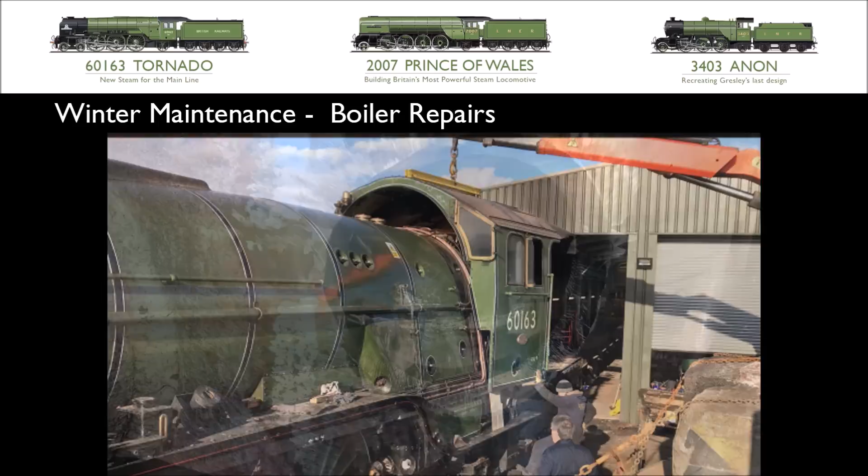A previous A exam had identified that we would need to repair some cracks beginning to form in the firebox corners. So these were ground out and welded up under the supervision of our boiler inspector, and prior to the steam test, these were subjected to non-destructive magnetic particle testing.

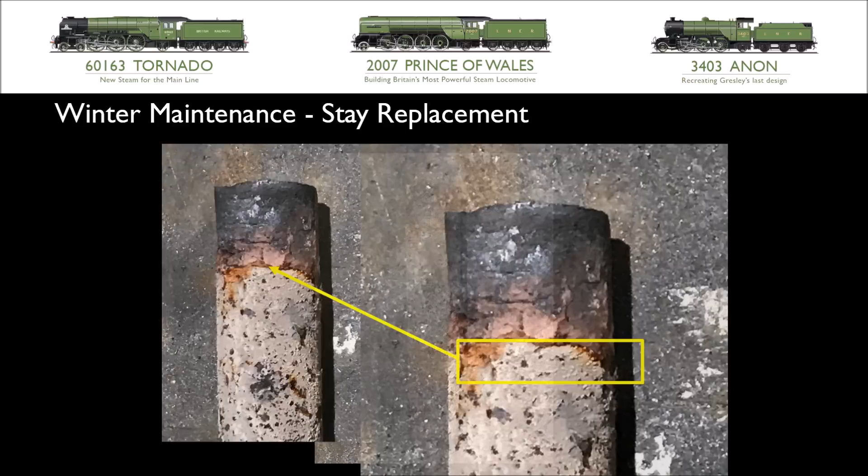The removal of 137 stays took longer than planned, as these were somewhat more stubborn to remove than they should have been. Many seemed initially in good condition, but on closer inspection we realised that we had made a good call to replace them before more failures occurred when the loco was in traffic. And once removed, it's a fairly simple welding task, if you know what you're doing, to replace them - first welding up the outer end before welding inside the firebox.

As part of the maintenance, all the motion was taken down to inspect the bearing clearances, and the oilways and felt pads were cleaned and replaced before reassembly, and key components were also tested to detect any cracks or flaws developing in the rods or the motion.

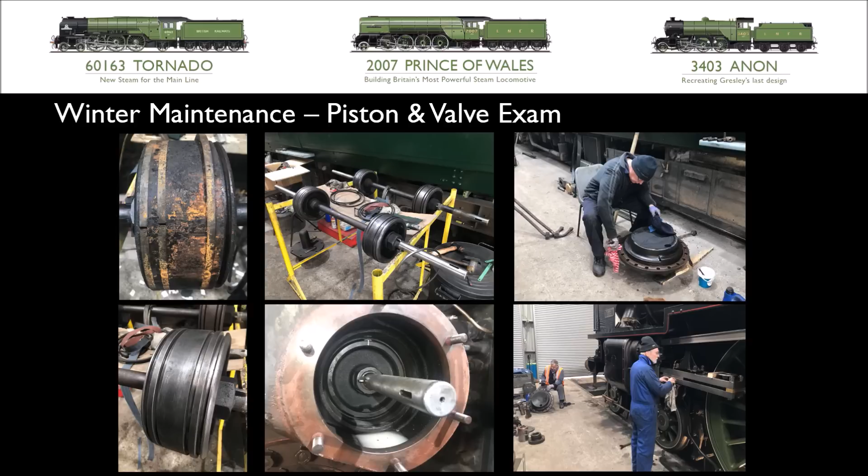At the front end, the valves and pistons were examined to ensure no broken rings or other issues were present, and that there was no excessive wear in cylinders or valve bores. Once cleaned and inspected, these were all oiled, replaced, covers replaced and flogged up tight.

Attention was not solely focused on Tornado, and our support coach received a great deal of attention inside and out. The kitchen and compartments were thoroughly cleaned by our volunteers, and a local car valeting company left the seats in each compartment looking like new.

On the underframe, brake components were removed, sent for overhaul and refitted prior to completing a full annual exam in accordance with our vehicle maintenance instructions.

Finally, there was time for a steam test and a couple of days running in before running service trains for the Wensleydale Railway, and the full effects of COVID-19 began to take hold.

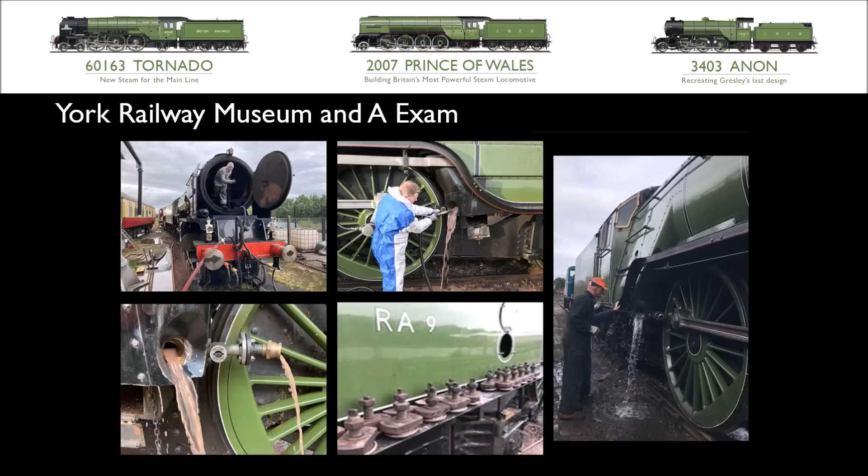With our first trains cancelled, we moved the loco and coach to stable at the Railway Museum in York, suitably protected from the elements and the pigeons. As other operating companies began to make plans to restart trains, we completed a full A exam and boiler washout, even though the locomotive had not been long in traffic before lockdown.

Following a successful steam test and an FTR exam, we moved across to Carnforth to undertake some work on the locomotive and coach. After arriving, we began a makeover to assume the identity of lost classmate 60145 St Mungo, using water-based poster paints and weathering techniques with advice from a colleague who has weathered complete locomotives in preservation.

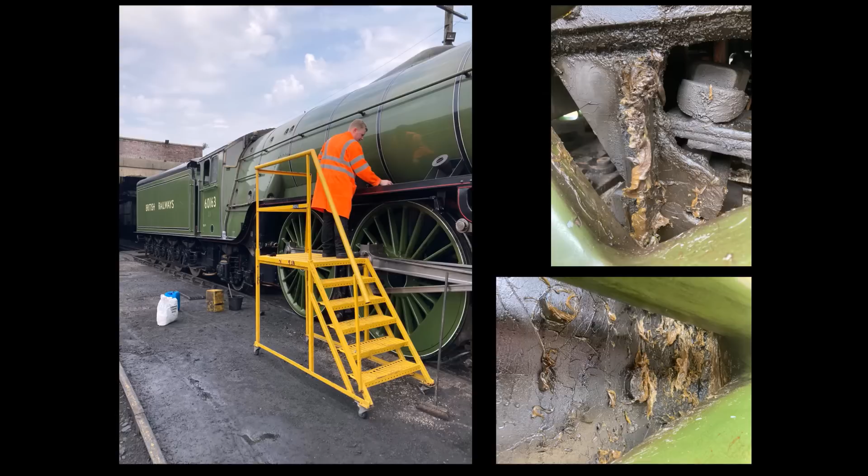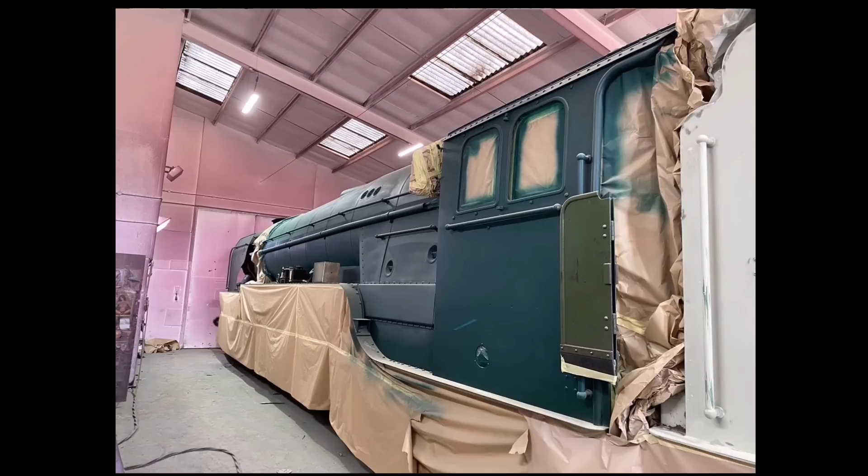Not just on the tender, but the locomotive as well, from rubbing down to the first coats of undercoat, several coats of gloss, and then the final lining out. I hope you will agree with us that the finished article is a credit to the West Coast Paint Shop team, to our own staff and volunteers, and all that have worked to deliver the locomotive into its new BR green livery.

Finally, many of you will know that DB Cargo's Senior Steam Traction Inspector, Jim Smith, sadly passed away earlier this year after a short battle against lung cancer. Jim was a really great supporter of the Trust, a real character and a friend to many of us. We were very fortunate that he was able to visit the maintenance at Leeming Bar and see so many of his friends there. We were not to know that this would be his last visit to see Tornado, but it was a pleasure to see him as always.

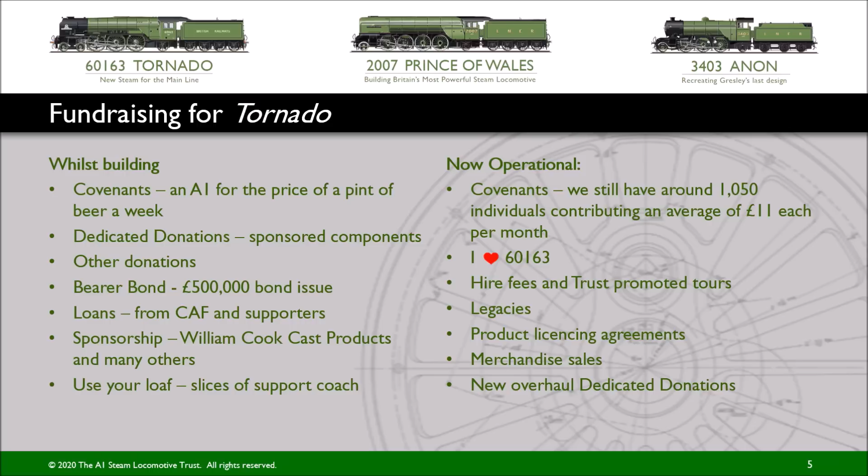I'm now going to take a look at the different fundraising methods that we use for Tornado. Clearly the most important of these remains the Covenant, an A1 for the price of a pint of beer a week. We did obviously use a variety of other fundraising methods during our time in which we were building Tornado, and some of those carried over into the operational life of Tornado, and others we introduced as well. I'm going to go through each of those one by one.

Our A1 for the price of a pint of beer a week Covenant is still the most important tool that we have to raise funds on an ongoing basis for Tornado and keep it operating on the main line. We still have over 1,000 Covenanters donating on average over £11 a month, which brings in around £170,000 a year to support the operations of Tornado. Even then, that isn't enough to actually keep the locomotive operating on the main line, which I'll touch on a little later on.

The Tornado Team is our club that we use to help to interest those youngsters aged between 5 and 15 in Tornado and everything that the Trust actually does. We've got over 100 members from as far away as Australia, Poland and throughout the United Kingdom. For parents and grandparents, it makes a fantastic Christmas or birthday present.

Legacies make up an increasingly important part of the funding to keep Tornado operating on the main line. We launched our legacy scheme in the summer of 2016, and since then we've received around 40 pledges to the office of people who have promised they're going to leave something in their will towards Tornado, and we've also received a number of significant legacies during the life of the project. Over the past year, the Trust received about £110,000 for Tornado, and that will be put towards Tornado's next overhaul, and of course the payment for its share of the spare boiler.

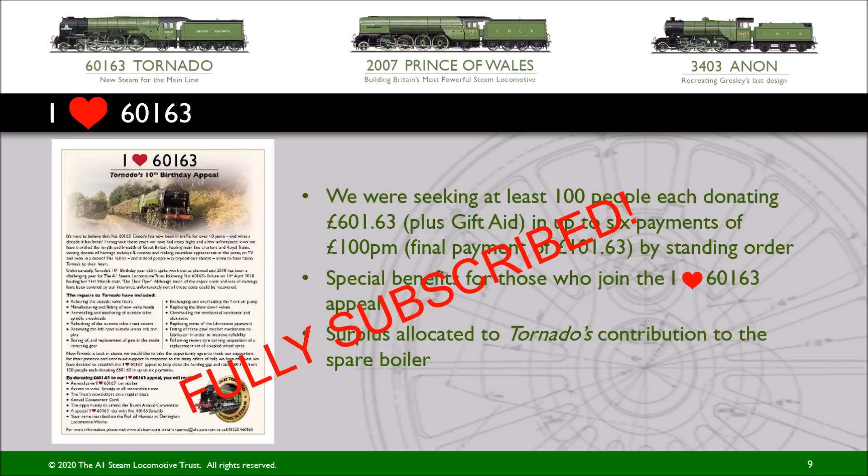The I Love 60163 fundraising scheme was launched to raise £60,163 for the unfunded part of Tornado's repairs. I'm pleased to report that over the course of the last year, that target was reached, and this fundraising scheme is now fully subscribed.

As we approach Tornado's next overhaul, there is a gap that we still need to fill in terms of funding of that overhaul due to the fact that Tornado hasn't been able to operate on the main line as much as we had hoped during this coronavirus impacted year. We've therefore decided to go back to our roots and to launch in the new year a new fundraising scheme based upon the dedicated donations scheme that was so successful during Tornado's building.

We'll go into that in much more detail around the time, but it'll involve being able to sponsor the overhaul or replacement of particular components that will be used during that overhaul. Please look out for the mailings that will be sent out during the early part of 2021.

So to summarise, Tornado still needs your help and support to keep her operating on the main line. What we'd hoped would be a spectacular year for our 30th anniversary as the Trust has turned out to be, unfortunately, a quieter one than we would have liked due to the impact of the coronavirus. We're therefore asking all of our supporters to see what they can do to support Tornado during these difficult times.

First of all, help us to reach out to recruit more new Covenantors by talking to friends, relations and other family members who may well be people who would be interested in supporting Tornado. When you're able to, please travel on one of Tornado's tours, and even better, bring some friends and family with you. You never know how they might enjoy the magic of steam.

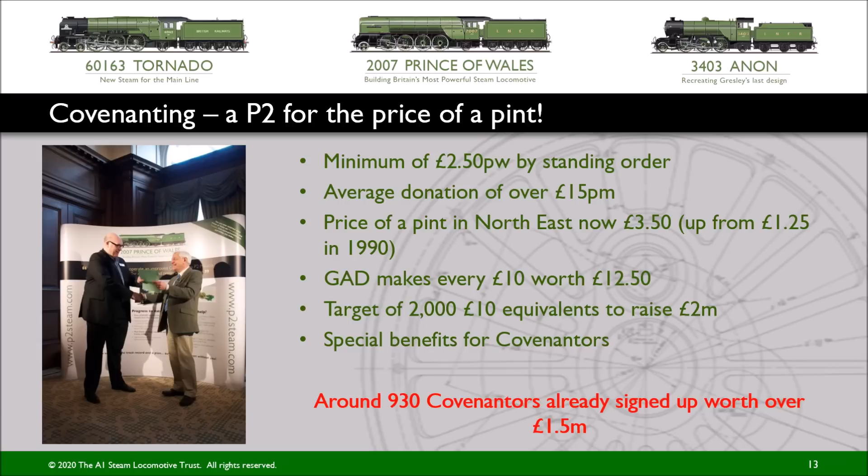One of the biggest challenges during 2020 has been not being able to conduct the outreach that we would normally do to try and bring on board new Covenantors. We had to suspend our programme of Works Open Days, and we had to do the same with our P2 road shows as well. So though we've managed to have a pretty successful year in terms of our other fundraising tools and techniques that we use, I'm afraid we haven't managed to recruit the number of new people to come on board as Covenantors that we would normally have been able to do.

Launched in July 2014, we've got a target of raising around £1.1 million from dedicated donations. There's still quite a long way to go, but there are an awful lot of dedicated donations that are available to sponsor. Should one not be there that catches your eye, please let me know, and we'll be able to find one that's suitable to any price and any pocket.

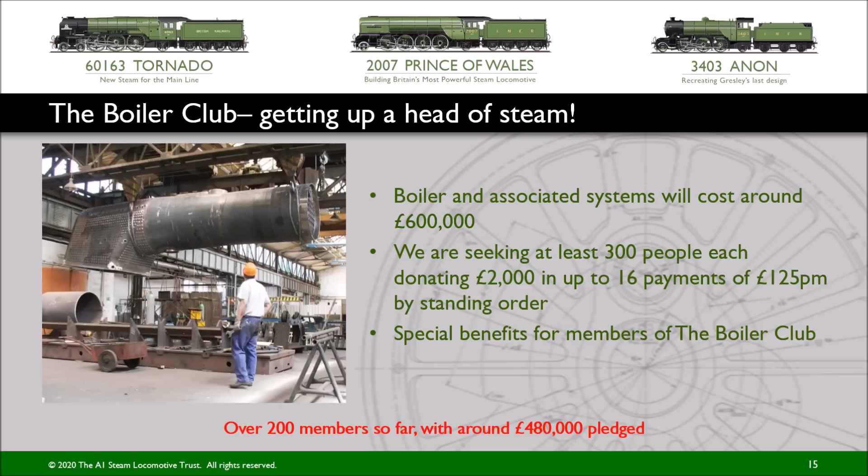The Boiler Club's one of the most important ongoing fundraising campaigns we have in support of building our new Gresley Class P2. As you can see, we've recruited over 200 members to this club so far, so that leaves us with 100 more to find by the end of 2021, when we expect our P2's boiler to arrive at DLW.

Sometimes things just don't work out as you'd hope they might do. When we launched the Motion Club, we were hoping that the club would progress at the same pace as the work on the Motion was progressing. Sadly, events conspired against us, and our fundraising campaign and the actual manufacture of the Motion got out of sync.

However, as you'll have read in Mikado Messenger and seen in TCC, we've made significant progress in recent weeks with the Motion for our Gresley Class P2, and the sight of all of that shiny metal enabled us to get the last few members over the line and hit our initial target of 175 members for the Motion Club, which means we've got that £210,000 pledged. Manufacture, as you know, is well underway, and I'm sure David Elliott will be covering that in a lot more detail later on.

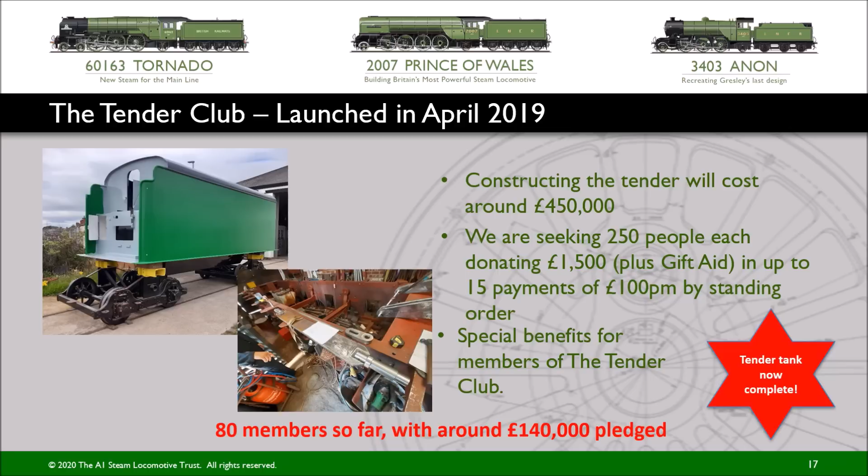We launched the Tender Club in April 2019 to raise £450,000 to fund the manufacture of the tender, and that club has made steady progress over that time. We've got 80 members out of the 250 that we require so far. In many ways, the tender construction progress has again moved ahead of that of the fundraising campaign that supports it. You can see from the slide here that the tender tank is now all but complete. Progress is very significant now on the tender frame, so it's vital that we encourage as many people as we can to join the Tender Club so that we can keep up with the pace at which tender construction is continuing.

In April of this year, we launched the first of our mini clubs. It was an idea to have something that sits between our dedicated donations and our larger clubs, such as the Boiler Club, to raise funds for a particular discrete part of the locomotive. We thought the pony truck would be a very good area to start, and we set ourselves the target of raising £20,000 for the manufacture of the pony truck. We hoped if any more funds came in over and above that, we'd put that towards the certification costs, which will be quite significant for this part of the locomotive where there have been design changes.

I'm delighted to say that we've received significant support in excess of the original 20 people we were looking for. In fact, we've had 30 people come on board so far, which means we'll be able to put those extra funds towards those certification costs, and we're expecting delivery of the pony truck to DLW in the not too distant future.

We launched the second of our mini clubs in June 2020, the Turbogen Club. This was created to fund the purchase and overhaul of our turbo generators, which will be two mounted on number 2007, and each will cost around £40,000. I'm delighted to say that so far 15 people have come on board, with around £18,000 pledged towards the first of those turbogens.

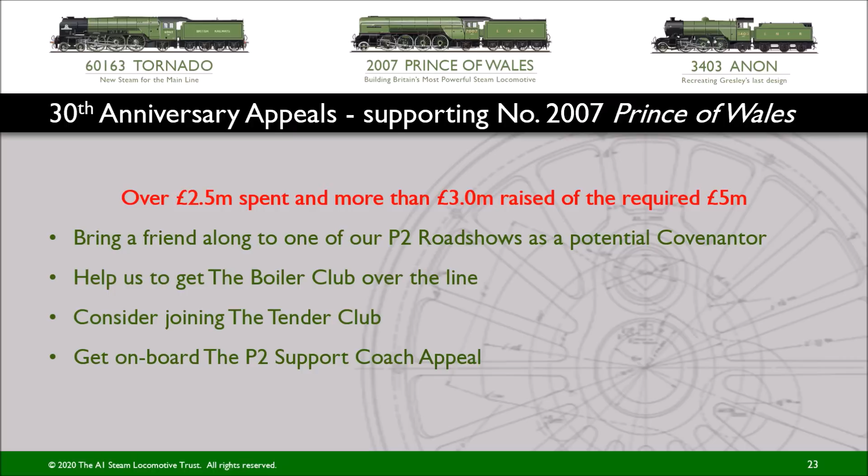Hello. The next few slides are probably the least interesting, but cover a very important aspect of the success of the Trust.

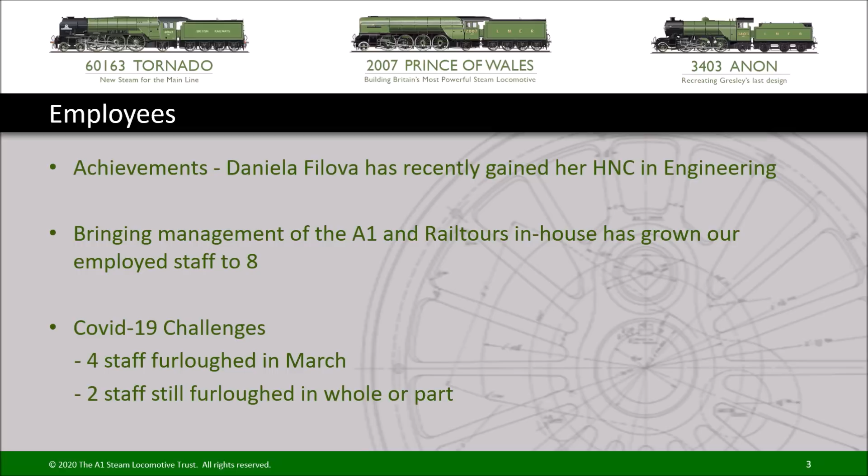Conversely, the pandemic has turned the world upside down, of course, and we've not been exempt from the effects of COVID-19. To help protect the business, 4 staff transferred to furlough status in March 2020. As rail tours recommenced, the Loco support team resumed full-time employment in August, and as of today, 1 staff member is still fully furloughed and another is working 50%. Thank you.

A very different experience stewarding at the moment, social distancing making it more difficult to do our normal job. We try once a year to have a day when we can all get together for a social and training day, but COVID has effectively stopped that. I am looking at a possible virtual meeting in due course. How would we have coped without technology during these past months? However, we are still all in contact with one another and we can all keep abreast of what's happening.

We had planned to use some more new technology for our merchandise operations, and although we haven't been able to resume that as such, we have given it a run through on the trains we've run by selling very appropriately face masks. It seems to have gone well and it will streamline that particular side of the business, both on train and at events.

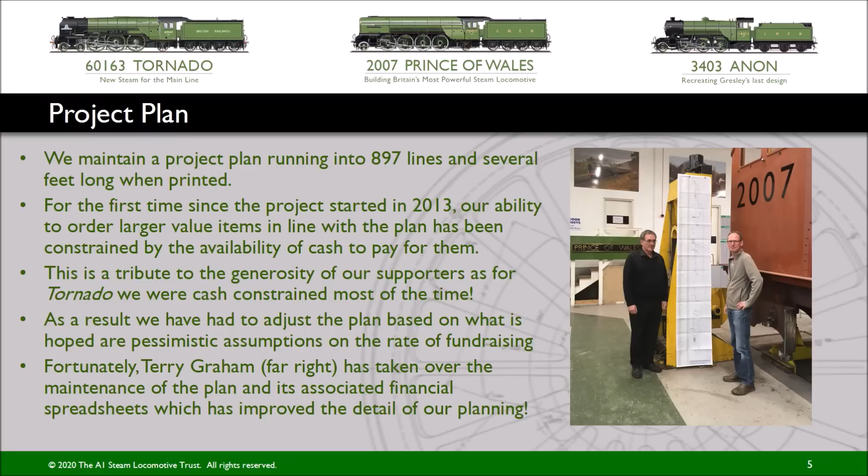This is actually a tribute to the generosity of yourselves and our other supporters. As for Tornado, we were cash constrained most of the time. As a result, we've had to adjust the plan based on what is hoped are pessimistic assumptions on the rate of fundraising. Fortunately, Terry Graham has taken over the maintenance of the plan and its associated financial spreadsheets, which has improved the detail of our planning.

The adjusted project plan sees many tasks starting later, so that by the time they are complete and the invoices are received, we will be able to pay for them. The completion of the locomotive is still showing as December 2022. However, as we approach completion, less costs are in the form of large purchases and outsources, for example the boiler, and more costs are in labour and small components being worked on at DLW.

This increases the timing risk, as large numbers of people working on the locomotive at the same time is inefficient, and at the present time would be actually illegal. We also have problems finding all the different skills we need when they are required. Several sections of the plan are near critical, in other words have little or no slack in them, so a significant delay with one will delay the whole project.

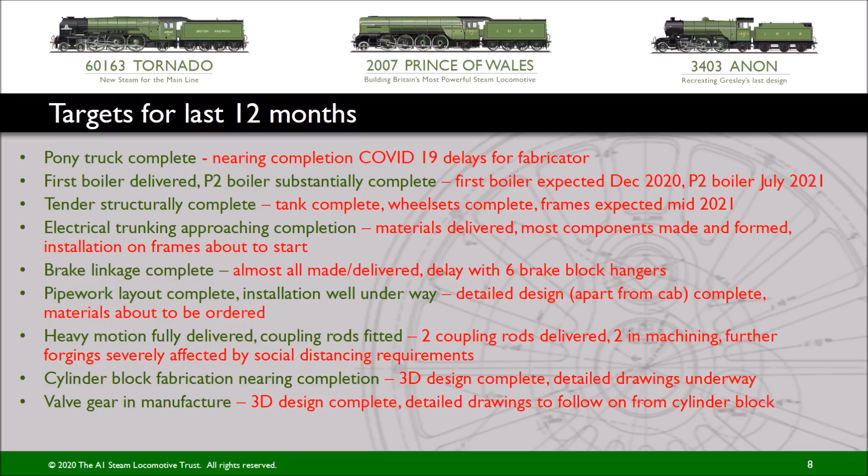The cylinder block - we are significantly behind where we hoped to be here, but the design work has taken a lot longer than we estimated in the first place, and this also applies to the valve gear.

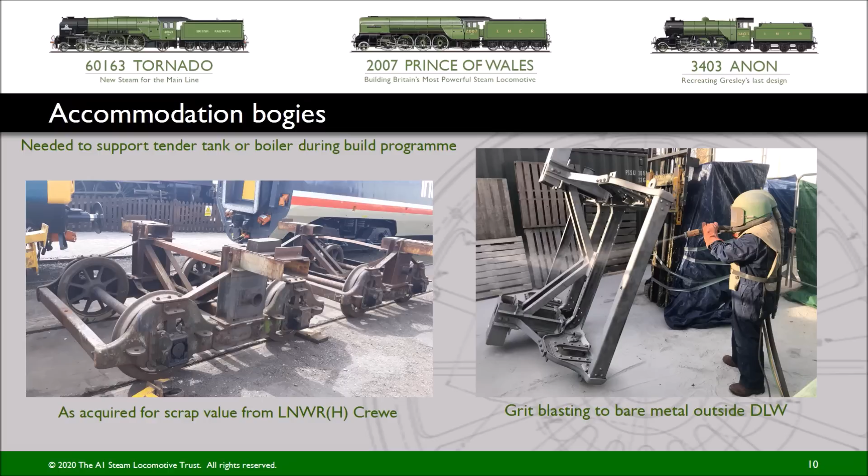Whilst Tornado was at Crewe Heritage Centre last year, we came across a pair of rather tired looking accommodation bogies which the Heritage Centre was about to scrap. So we did a deal with them and bought them for scrap value and brought them back to Darlington to overhaul.

In the meantime, we'd placed the order for the tender tank with Northview Engineering Solutions here in Darlington. They had previously built Tornado's tender tank, so had some track record in this area.

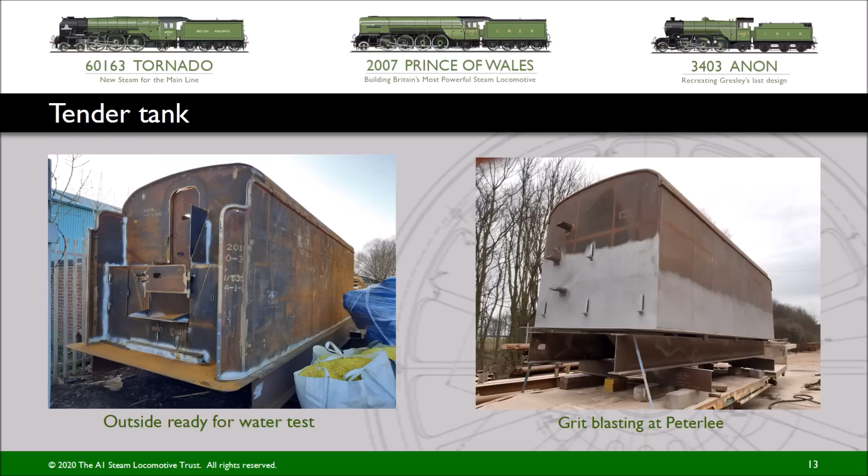Once the tank was essentially complete, it was taken outside to carry out a water test to make sure it didn't leak. Once these tests had been successfully completed, the tank was taken to a subcontractor at Peterlee in County Durham for grit blasting.

Once the grit blasting was complete, the tender tank was transported to Darlington Locomotive Works as soon as we had a dry day. Once inside, Ian Matthews immediately started on preparing, filling and painting the tank.

Once the tank had reached a point where the sides were in undercoat and the front, underside and top were in top coat, the tender was rolled outside to give us room to get the wheels out from underneath the frames. As soon as it went outside, it was wrapped up in tarpaulins to protect the paint, pending the time when we are ready to put the final livery on.

Prior to the delivery of the tender tank, the wheel sets arrived from South Devon Railway Engineering down at Buckfastleigh, where the wheels had been pressed onto the axles and the tyres fitted to the wheels.

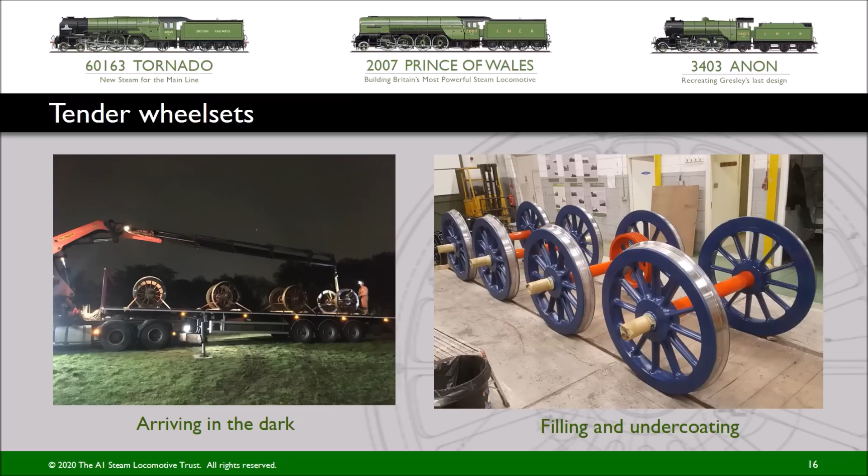Once they were here, Ian Matthews quickly set about filling the spokes and preparing them for final painting. Simultaneously, the tender frames are being erected by Ian Howitt at his works at Crofton near Wakefield.

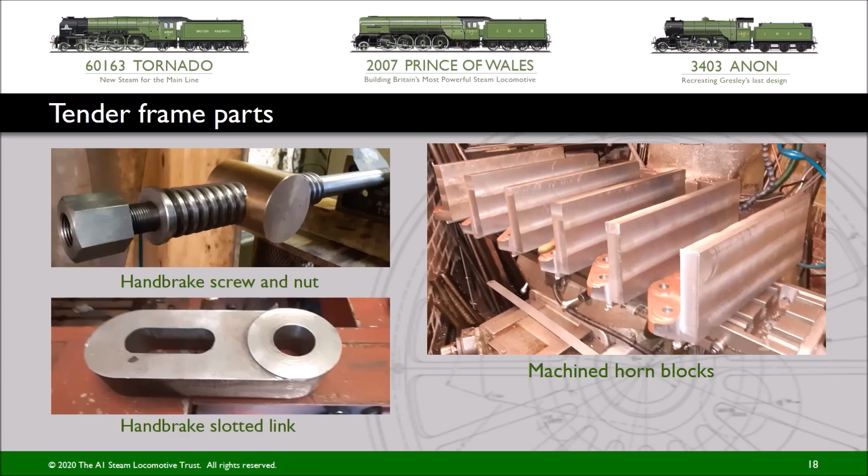Other components that have been made include the handbrake screw and nut, which you can see on the top left. The horn blocks have all been machined, ready to be finally fitted to the tender frame. And the third item you see at the bottom is the handbrake slotted link, which ensures that the brakes can still go on and off when the handbrake is released.

As you will probably be aware, we have ordered 2 new boilers from Meiningen Steam Locomotive Works in Germany, similar to that on the A1 Tornado. One is a boiler for the P2, the second to act as a spare for both locomotives.

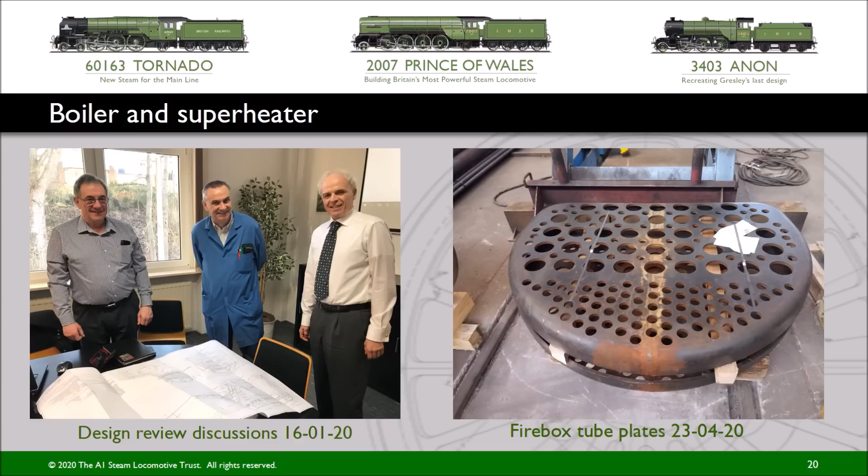On the right is Udo Dries, who acts as interpreter as well as being something of an expert on steam traction in his own right. The right-hand photo shows the 2 firebox tube plates that have been made by April of this year.

By July of this year, Meiningen have already started to assemble inner fireboxes for the 2 boilers. Also, in June, they delivered the first set of superheater elements, which we had asked to receive early.

Prior to this we only had a few specimens as spare parts for Tornado, and if the superheater on Tornado developed a problem, it's usually best to fit a complete new set of elements.

As you will see in more detail during the video walk around, we had to do some remedial work on cannon and axle boxes where the castings turned out to be rather thicker than was expected.

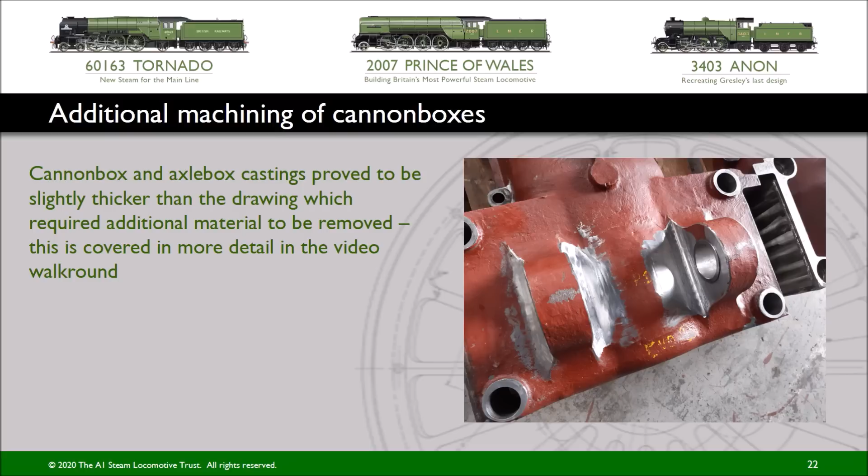Meanwhile, steady progress is being made in producing the spring gear details, including the coupled spring bolts which you see on the left and the spring links which connect the springs to the undersides of the axle and cannon boxes.

Alan Parkin has now completed the detailed design for the new sander installation. The original P2s only had sanders for forward operation, as in the 1930s it was not expected that an express passenger locomotive would have to haul a significant load in reverse.

However, today, when we're on heritage railways and for some of the more peculiar operations we have on the main line, such as when we did the plandampf, we will be hauling trains in reverse, and possibly quite heavy ones, so it was felt advisable to put a set of back sanders on in addition to the forward ones.

Alan has also been busy completing the detailed design and overseeing the manufacture of parts for the new axle-driven alternator, which we have designed to replace the old 1960s vintage equipment that we have on Tornado and the support coach.

Spare parts for the old equipment are getting very hard to find. This alternator uses a large truck or bus alternator inside a very heavily built protective casing, as you can see on the left.

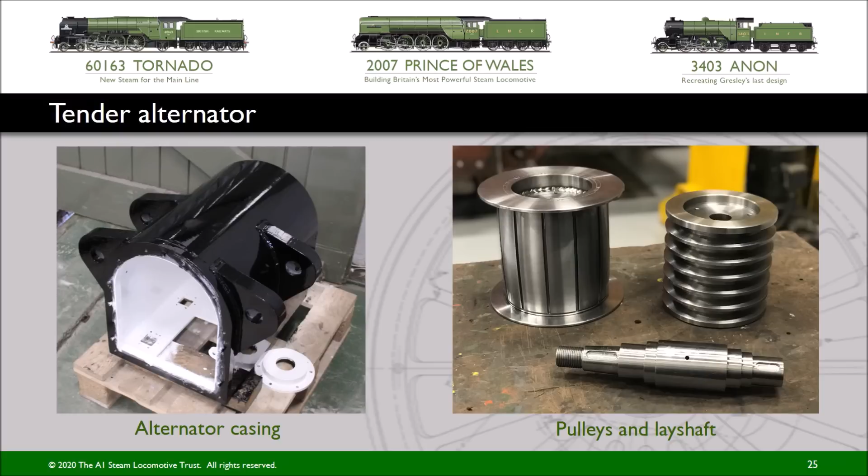On the right you see a choice of either flat belt or multi-groove V-belt pulleys, and the lay shaft, which is used for the toothed belts which increase the speed of the alternator relative to the pulleys, as is required to get the output over the full speed range of the vehicle.

The cylinder block has now reached the stage where we have finalised the detailed design of the fabricated version of the original monoblock arrangement that was fitted to the first P2s.

The right-hand view here shows all the welds with the plates and tubes removed, and gives you an idea of the complexity of this construction, with somewhere in the region of 140 separate components in it.

Alan is in the process of turning this into manufacturing drawings, which will enable us to go out to various parts of industry for quotations and discussions on constructing the beast.

One of the significant areas of redesign on the cylinder block has been the rearrangement of the valves for the middle cylinder to make their characteristics as near to identical as those for the outside cylinders as possible.

If you look at the drawing on the left, which is the original block, you will see that the valve chests for the inside cylinder were arranged either side of the middle cylinder.

This had the unfortunate result of producing a steam space for the two valve ports which was very large, and this resulted in what is known as a large clearance volume compared with the outside cylinders.

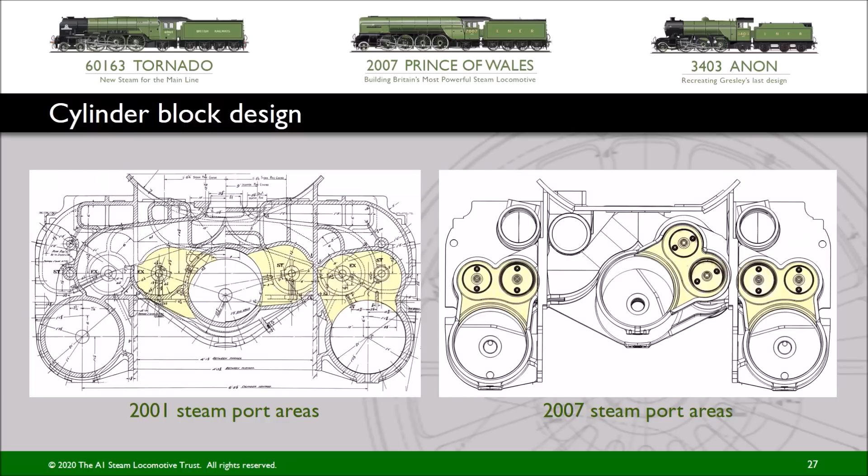And the larger it is, the less efficient the cylinders are, because steam has to fill that space without actually doing useful work on the axle of the locomotive.

Work has continued to refine the design of the valve gear, including the cam box, illustrated here without its outside casing. An additional challenge that has arisen from the decision to group the inside cylinder valves beside one another is that we now have to move the drive for the inside cylinder steam valve across the width of the engine.

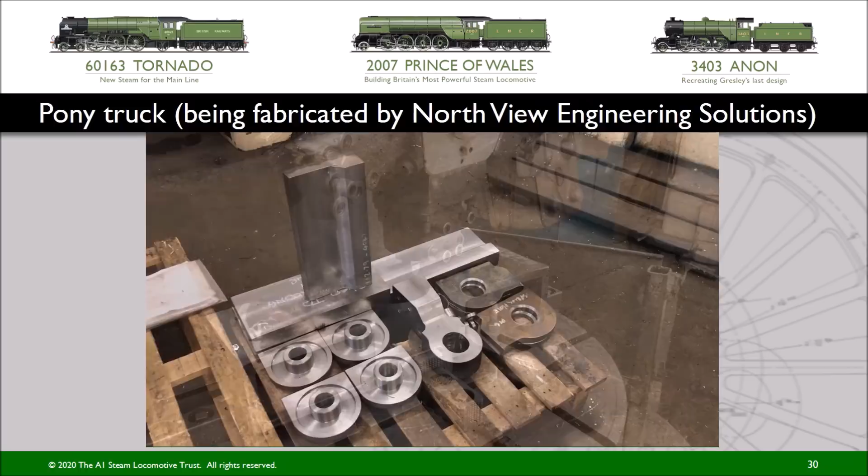And this section through the cylinder block here shows a simple rocking shaft which transfers the drive from the inner end of the cam box on the fireman's side of the engine across to the inside cylinder steam valve. We start with machined profiles and detailed components, including the crosshead assembly.

We now see the pony truck frame having been tacked together prior to fully welding. This is the practically completed pony truck frame after it's been away for stress relieving, grit blasting and priming. The welds here are of good quality visually and have already been subject to NDT.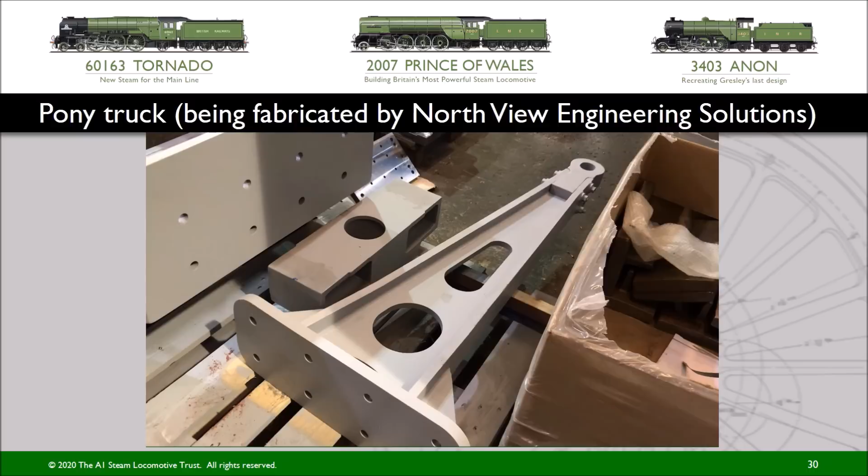Alongside the pony truck frame we see the steering arm, and between the arm and the pony truck frame is the crosshead. These are all awaiting final machining.

Our charitable status is on the basis that we are an educational charity, and to this end we try to carry out educational activities such as opening the works up and presenting lectures around the country when the circumstances permit. We also encourage youngsters to come into the works and learn engineering, and to this extent Daniela has just completed the second year out of a 6-year degree apprenticeship in mechanical engineering, where I'm pleased to say that she's just received the award of HNC with distinction.

I will now hand you over to Rob Morland, our Head of Electricals. Rob, being a first-class electronic engineer, occasionally resorts to use of acronyms, and there are two in this forthcoming presentation which you may not be familiar with. ETCS is the European Train Control System, which Network Rail and much of Europe is gradually introducing onto its main lines, and PCB stands for Printed Circuit Board.

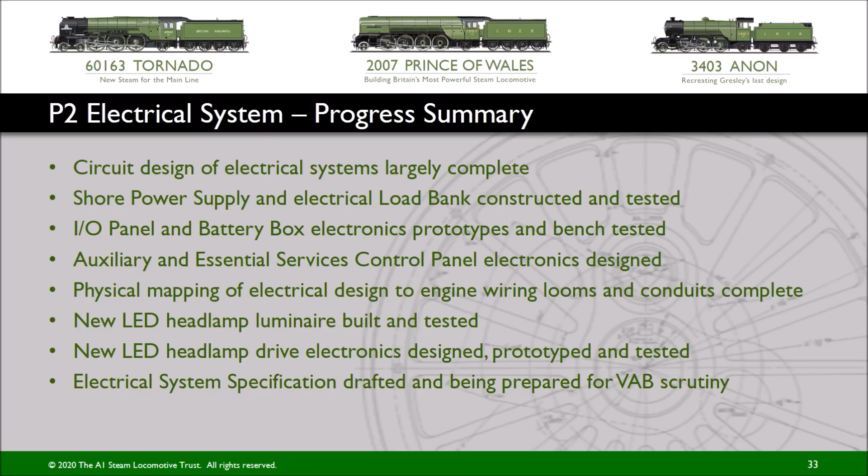All the major electrical circuits have now been designed. Where possible, we've reused the A1 design, updating this if required based on our experience with operating Tornado. The main enhancements include an automatic system for directing power from the two turbogens to the loads, and an additional battery and charger system to power ETCS.

With the additional power demands of new systems on the P2, including ETCS, we needed a higher capacity shore power supply. By using modern electronic AC to DC converters, we have been able to house this in the same size box as for the A1. It provides up to 2000 watts from AC mains voltages between 85 and 305 volts. This will cope with the wide variances that we've encountered in some depots. The supply has been built and fully bench tested.

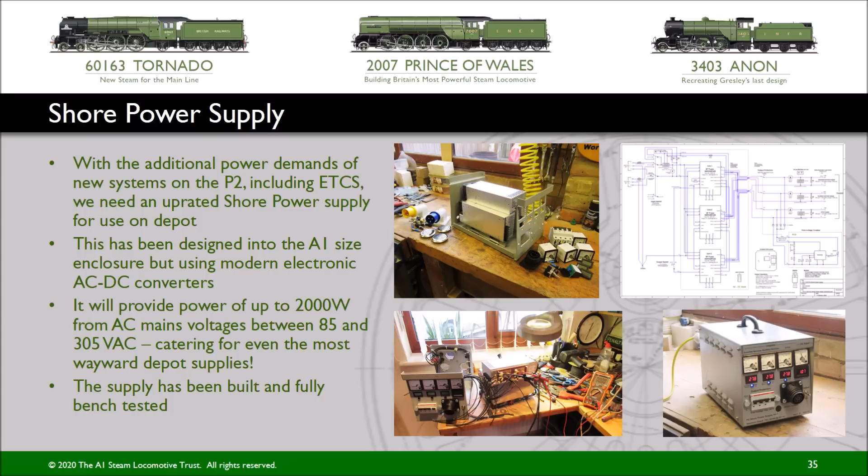To test the new shore power supply and axle-driven alternator, we need a high-capacity electrical load bank. We've designed this to load up to 208 amps at 28 volts, equivalent to 5,800 watts. It uses 8 1000 watt resistors, each cooled by its own fan. So far we have tested it on the new shore power supply at 85 amps. It works fine and heats the workshop nicely.

We have completed the electronics design for our distribution boards, or I/O panels as we call them, together with the battery boxes.

The designs are based on the A1 system with some simplifications and additional features to improve reliability and assist maintenance. The system has been built on the bench and fully tested. It all works as planned.

Design of the essential and auxiliary control panel electronics is complete. The panels provide all the facilities that are on the A1, plus some enhancements in light of experience. We have added a circuit to detect battery fuse failures with LED indicators to alert the crew. As our power supply design automatically takes power from generators if batteries aren't available, a blown fuse may not be noticed until the turbogen is switched off, at which point all the lights go out.

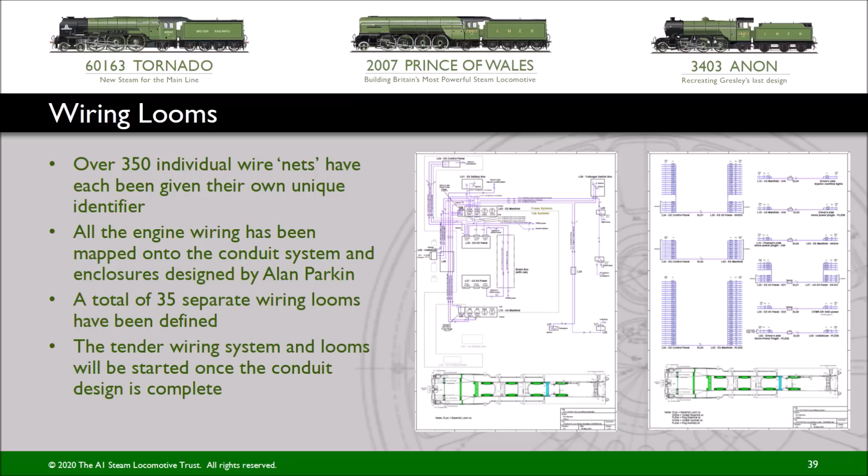Over 350 individual wire nets have been given their own unique identifier. All the engine wiring has been mapped onto the conduit system and enclosures which have been designed by Alan Parkin. 35 separate wiring looms have been defined for the engine. The tender wiring system and looms will be started once Alan has finished designing the conduits.

Our optical physicist Roger Millington has completed the design of our new combined LED head-tail marker luminaire. This includes a 3D printed support frame and diffuser. The design allows any of the three aspects to be displayed from the same unit. It will fit within the replica of the original lamps, which is being designed by Alan Parkin.

Alan Green, who designed and built the A1 luminaires, has designed the drive electronics, laid out the PCB and built and tested the first prototype. The PCBs are now being manufactured.

Looking now at next steps, the P2 electrical system specification is approaching completion. This will be reviewed internally before submitting to Ricardo for independent design scrutiny. Work on the tender electronics will start shortly.

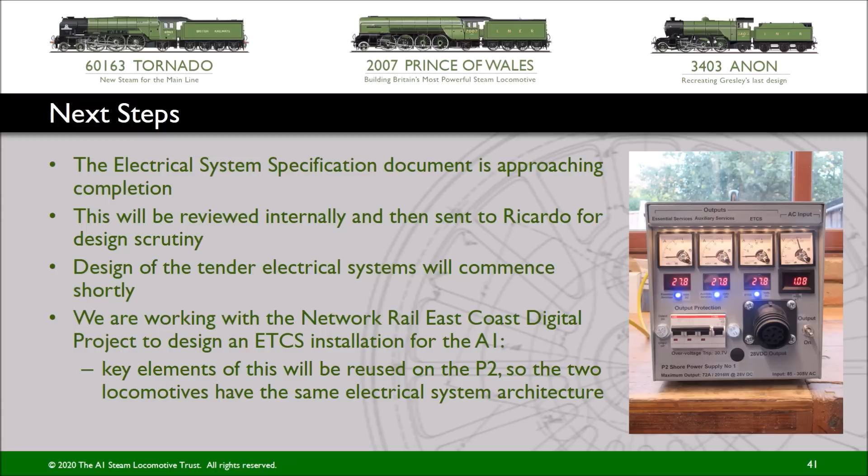We are working with the Network Rail East Coast Digital project to design an ETCS installation for the A1. Key elements of this will be reused on the P2 so that the two locomotives will have the same overall electrical system architecture. We're looking forward to fitting the first electrical items to the locomotive over the next year.

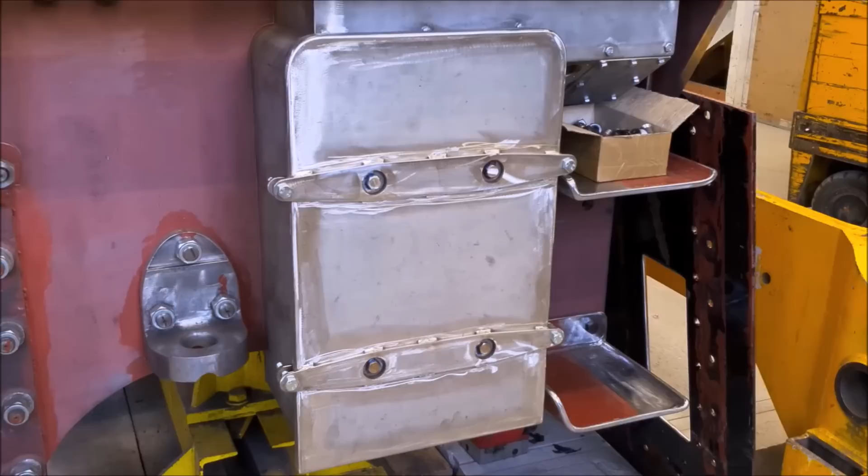And here you see one of the battery boxes, which has been enlarged slightly to give us the option to put bigger batteries in if necessary, as the ongoing requirement for electricity on the locos just seems to keep rising all the time. And this is now being trial fitted to the frames.

We have actually had to modify it from our original design for this, as we have discovered recently that we had a gauge infringement with Tornado, in as much as the back footsteps were going to foul one of the stations on the Cumbrian coastline. So we have narrowed them down by 1 inch to get us back into the loading gauge.

Interestingly, we have been there before, but it appears that engineering works have gone on both the track and the platforms, which has reduced the clearance. So to make sure we don't have the same trouble with Prince of Wales, we have done the same thing. The footsteps here have been narrowed down by 1 inch, and we have then had to make sure that the battery boxes are not proud of the gauge as well.

One of the key differences between Tornado and this locomotive is that this time we are putting a lot more attention into making it easy to remove the cab, which is necessary if you need to do any repairs on the back of the boiler.

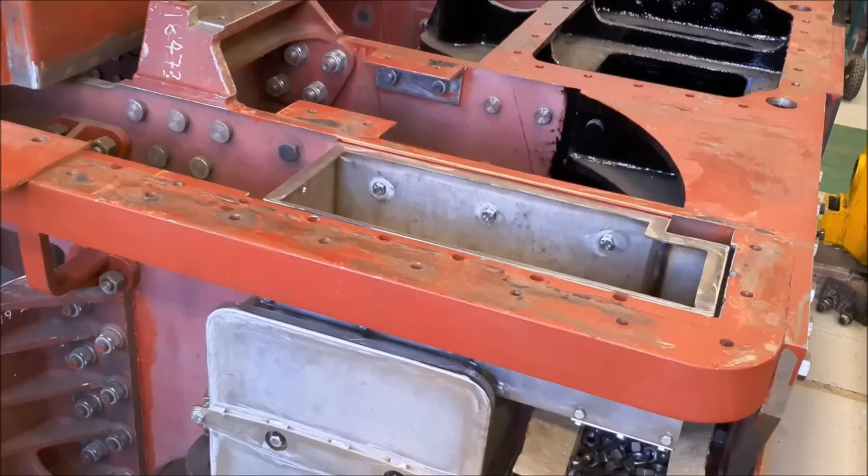And to this extent, rather than as on Tornado, where cables from the frames up into the cab go up to sockets right up underneath the drivers' and firemen's seats, we are going to put a series of sockets in the floor of the cab, just raised clear of the running plate, and you'll be able to take this cover off and undo the 4 plugs with their cables and sit them in the space in the top here, and then the cab can be lifted straight off without having to make any more electrical disconnections. There is a similar arrangement on the other side.

And what's been happening here is that Ian has been doing subtle adjustments to the boxes and the space in the framework underneath to make sure this is installed, and that when it is finally fitted, there'll be rubber sealing joints to ensure that we keep the water out as far as practical.

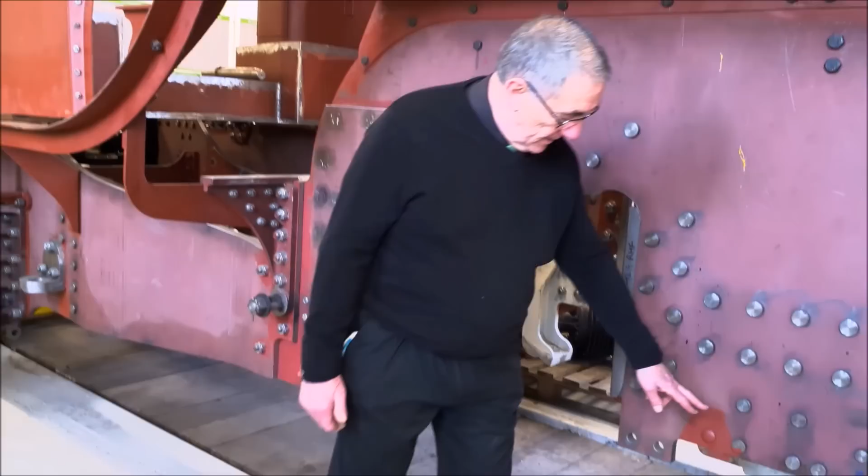With the delivery of the last of the spring hangers, we've been able to finally fit them to the frames. And in the case of this one here, we've been able to substitute the original cold turned rivets with driven bolts, which is the way the rest of the frames are assembled. However, there's one here where we have had to retain a cold turned rivet.

And the reason for this is that if you can imagine in here, the spring bolt comes up and the spring comes away under here and goes to the other end here. When you need to remove the spring, the thread on the end of the bolt there would get in the way of it and you couldn't actually lift it out. So we've had to put a cold turned rivet in there.

And for the purposes of this, Ed made all the cold turned rivets we require, and Ian has subsequently fitted them all. This effectively completes the fitting of all the spring gear, the spring hangers, ready to take the spring gear.

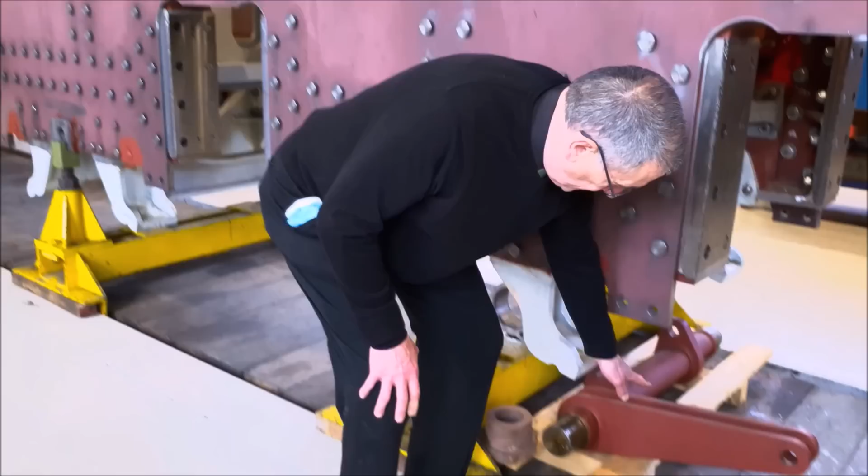The latest arrivals being this, which is one of the 2 brake cross shafts, which transfers the drive from the air brake cylinder to the pull rods that actually apply the brakes to the wheels. We now have all the bits we need to fit these, and indeed we've got the castings here for the bearings, which go on the end of the shaft and the outside of which fits in here so as to enable the brake shaft to be fully installed.

And when Ed's finished what he's doing at the moment with the regulator stuffing boxes, he will be onto that task so that we can get both the brake cross shafts fitted.

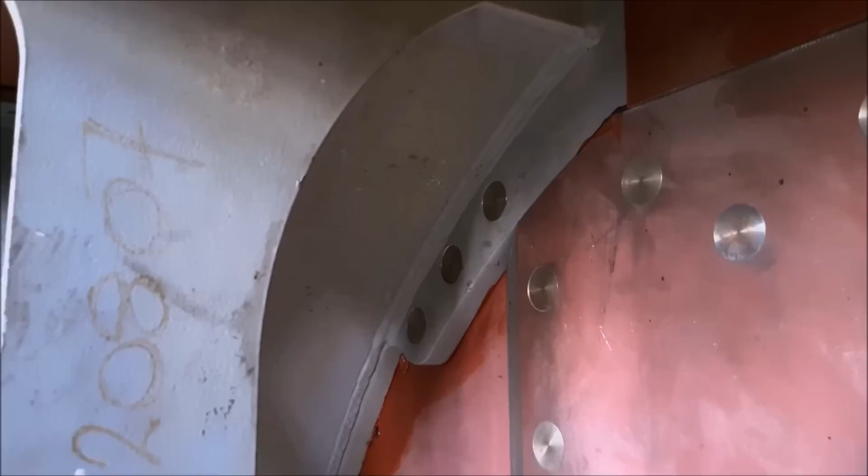Whilst we substantially fitted the motion brackets over a year ago, there was an outstanding problem insofar as 3 of the bolt holes, here, here and here, needed to be countersunk to take countersunk bolts so that the bolt heads did not foul the back of the tyres on the leading wheel set. This proved to be a bit of a problem because, as you can see, there is very little space between there and there in which to get a drill with a countersink on it.

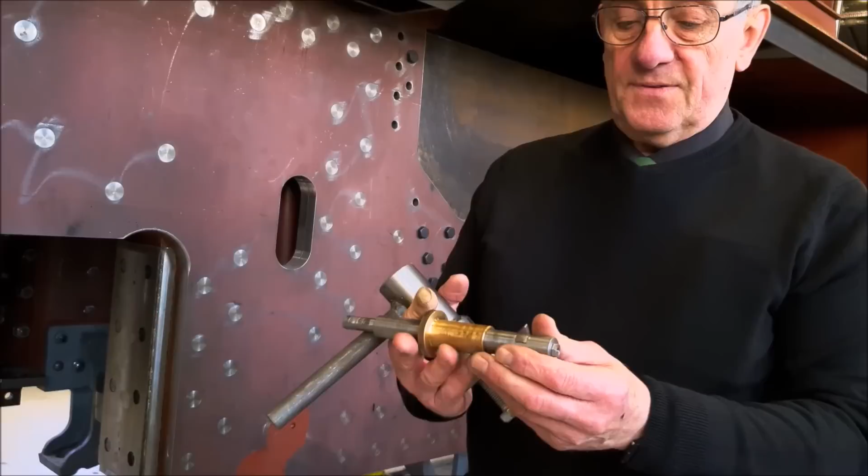So we got round this problem by making up this apparatus here, which is basically a back countersinking tool. That device, the bush there was placed in the hole, the countersinking tool was threaded through the bush, and a drill attached to the inside end.

And in order to apply the feed on the tool here, which is cutting the countersink, this device was made up, which by turning the handle and the nut and the bolt, slowly jacked the countersink into the hole. A piece of really good quality Heath Robinson, which worked very well.

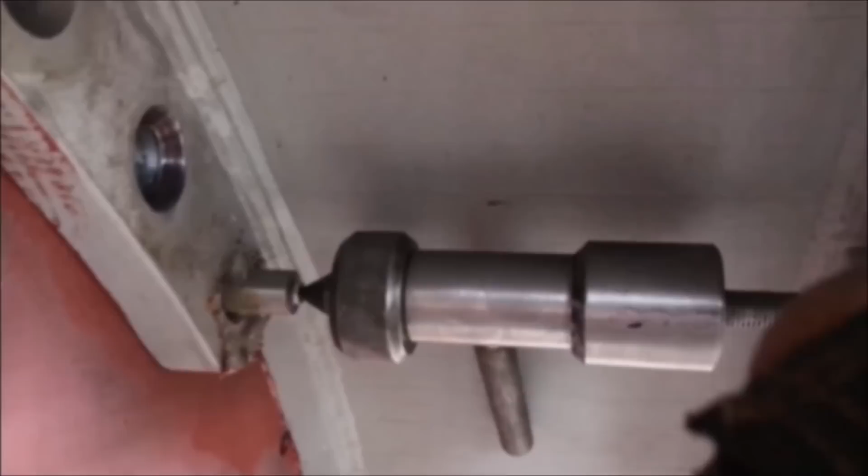Having completed the fitment of these three bolts on each side of the engine, we're now in a position where the frames are substantially complete. The only other major structure to be fitted into the frames are the cylinders, which you can see the aperture where they fit here.

As those of you will have seen from photographs of the original Cock of the North when it was introduced in 1934, a very high standard of finish was applied to the locomotive. And indeed you'll see we've already polished the wheel rims, but in addition to this, we are keen that the bright work is really finished to a high standard.

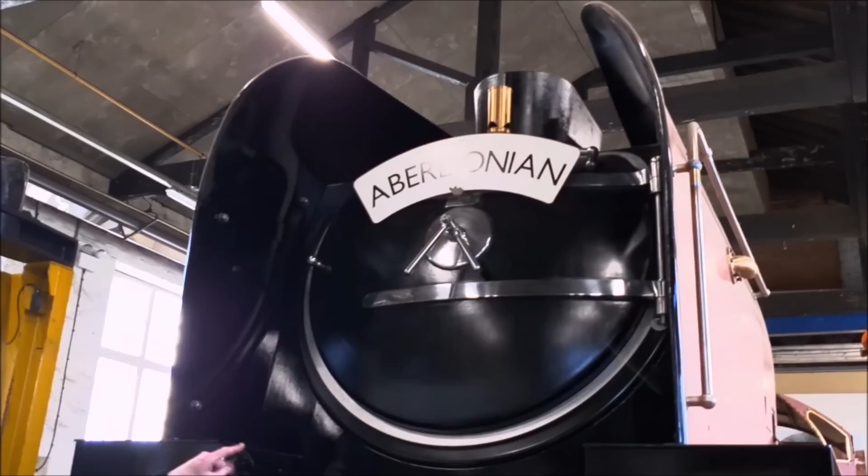To this extent, we've been very fortunate in having a volunteer who loves polishing things. If you look up initially at the hinge straps and pins on the smoke box door, he has achieved an almost mirror finish on those by working for several weeks with wet and dry of various grades right down to the finest. When he finished that, he asked if there was anything else we'd like to have polished. I suggested he might like to do the leading draw hook.

And as you see here, it is a beautiful job that he's done. Once we've got out of COVID and he can come back to join us, because unfortunately his age puts him into the vulnerable group, I've asked him if he can do the screw coupling that hangs on here as well. Then it'll be just up to us when the locomotive is in operation to ensure we maintain this superb finish on it.

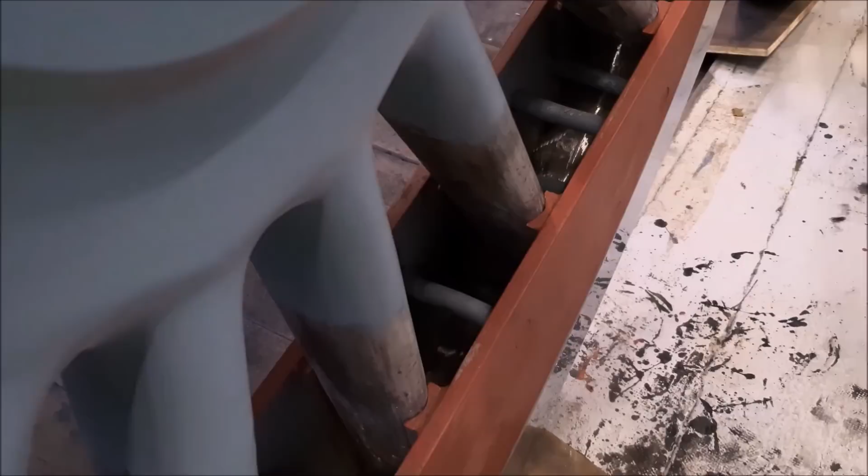Another relatively small job that we've completed over the last 12 months is the riveting of the balance weight plates onto the wheels, so that in due course, when we're ready to balance the wheels, we will pour a lead antimony alloy into the spaces between the spokes to achieve the required weight to ensure that we have the correct level of balance for all the rotating components on the crank pins.

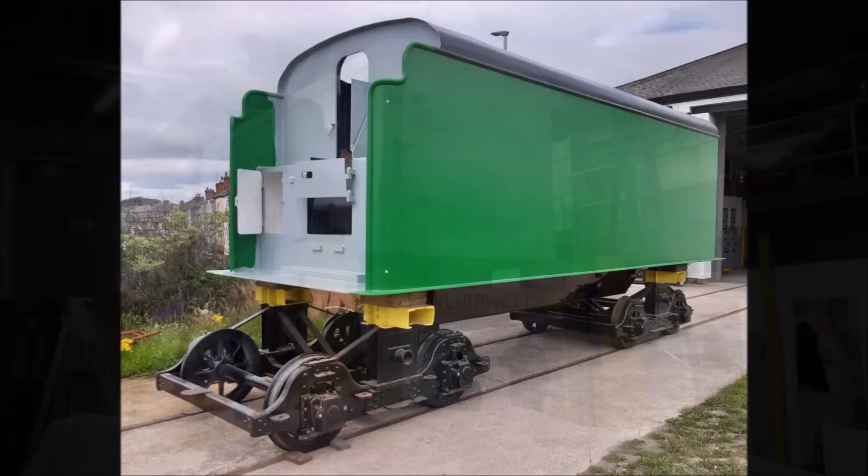One of the major steps forward for this year has been the delivery of the tender tank. Once it arrived here, it was placed inside the workshop, and Ian Matthews then spent several weeks filling, sanding, priming, undercoating, and basically making the tender tank secure paint-wise. At the moment, all the black areas are in finished paintwork, the green is in undercoat.

The tender tank is presently sat on accommodation bogies, which we were fortunate to acquire from Crewe Heritage just over a year ago and have subsequently overhauled. Interestingly, these appear to have come off Central London Railway stock from about 1920, so are actually antiques in their own right.

Now that we've had a good look round the locomotive frames, the tender and the wheel sets, we will move over to some of the many detailed components that have either been made here or are being finished off here at the moment.

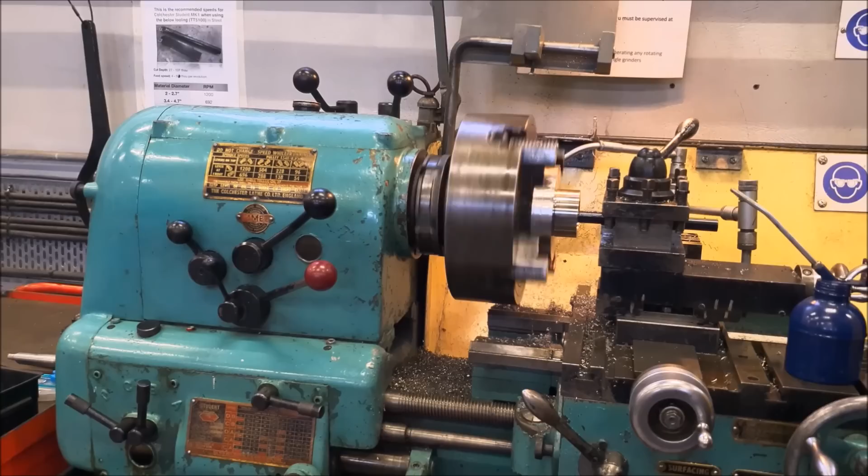Ed Laxton, our apprentice machinist, is currently making a whole series of detailed parts for the regulator stuffing boxes and cross shafts for the new boilers. Here you see Ed making one of the stuffing box glands from stainless steel, which, as its name implies, will prevent the steam and water from coming out of the boiler into the cab. These are identical to the components that were made for Tornado back in 2007.

These are the two regulator cross shafts for the new boilers that are currently being built in Meiningen in Germany. When they're finished, they will have a regulator handle mounted on each end, which is the familiar bit you can see in the cab.

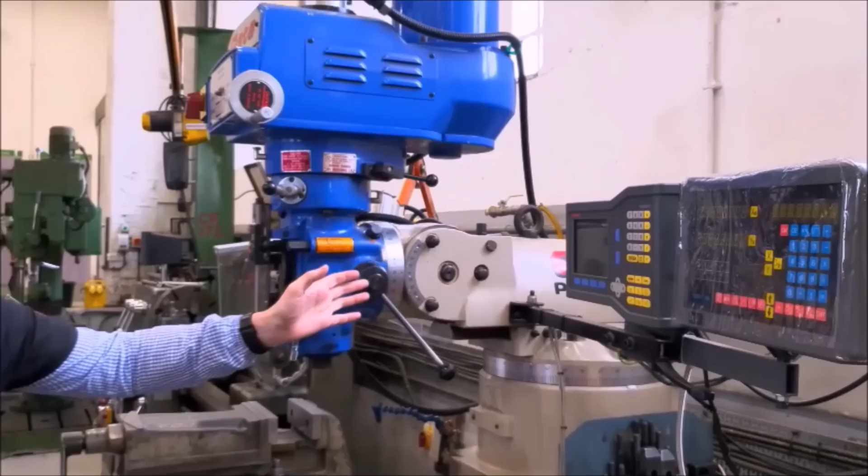We hired a new apprentice machinist, but sadly we were embarrassed with the state of our machinery. So as part of this new arrangement, we acquired a replacement for the original Bridgeport milling machine. As you can see, it's a different make, but it's a clone of Bridgeport. It's a well-built machine with a high standard of accuracy.

We also purchased new tooling which is more suitable for this type of machine, and if you will follow me there, you can see the results of our new apprentice machinist's work.

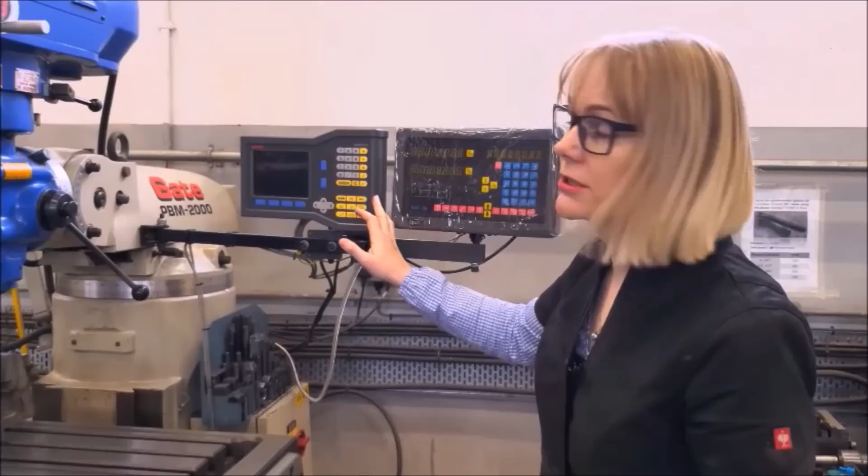This new milling machine's got nice features. The main one is a digital readout. That's a big improvement over the previous one, because this allows us to set up jobs more quickly and produce work more precisely. Another of these new features is a driven axis, so for a small adjustment we can move the table manually, but we can set it on auto feed and let it go during the milling.

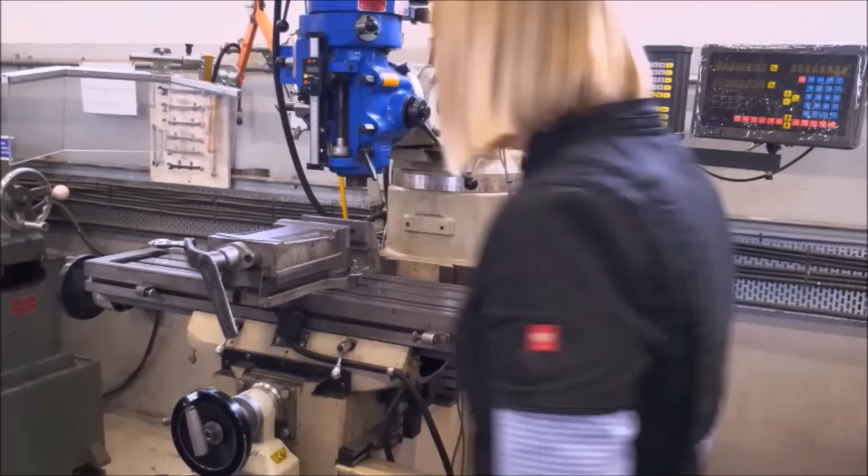Another improvement is that it's not only one axis which is driven, there is another one, the cross slide, which works in automatic mode as well. This saves a lot of time. The last feature which has been added, and it wasn't on the original machine, is a quick tool release or clamping system, which is pneumatic. You just need to press a button to release a tool, put a new one in, press a button, and you can start machining. Again, an amazing save of time.

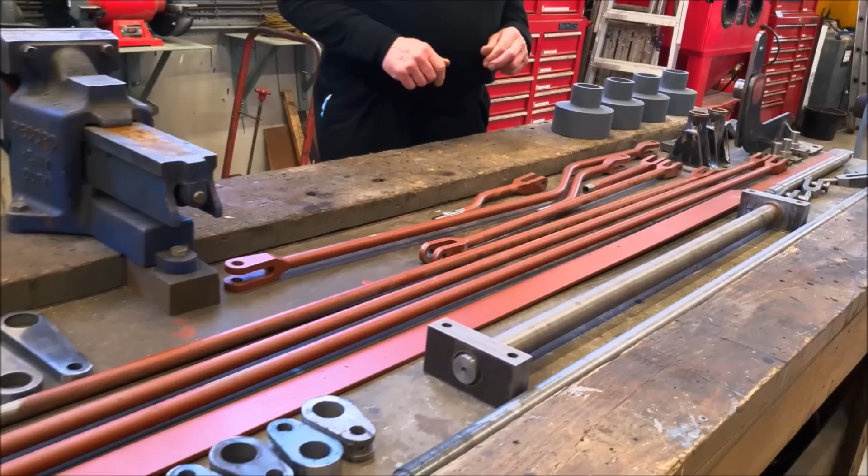Here we see a selection of components for the cylinder drain cock gear, most of which has now been manufactured, and we hope to be starting to put this on the engine in the very near future. We also have components here for the pony truck. These are spring cups which locate the springs centrally on their bolts.

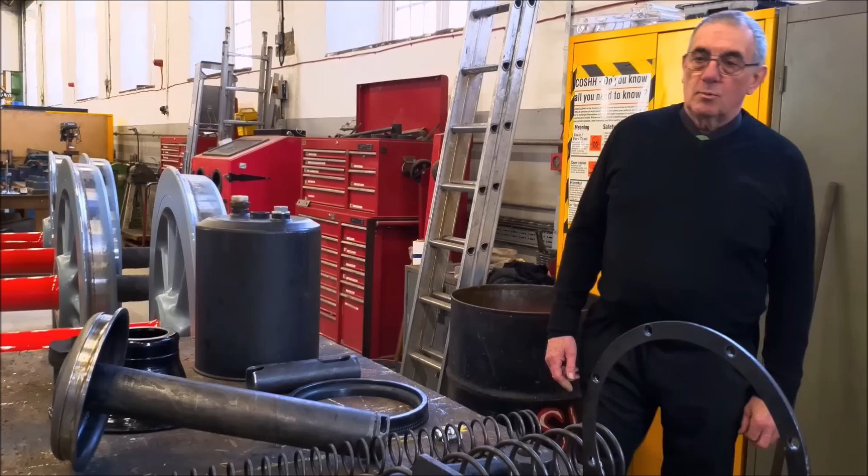One of the problems that afflicts us from time to time, particularly as time passes by, is that equipment we bought for Tornado, which was apparently in full production and likely to be for a long time, eventually becomes obsolete. One example is the 12-inch brake cylinders used on Tornado's engine and tender, which we have chosen to use on the P2 and may even use on the V4 in future. These are actually used on almost all the mainline air brake steam fleet. Unfortunately, the manufacturers in Macedonia appear to have stopped making them, which presents us with a bit of a problem. There are other brake cylinders available, but their geometry is different, so we would have to redesign the brake system on both locos to use them.

So as a precaution, I have completely dismantled this brake cylinder, which is Tornado's spare, and have reverse engineered it by producing a 3D CAD model which is as accurate as we possibly can make it, so that if we are unable to source new ones off the shelf, we can actually manufacture our own in future.

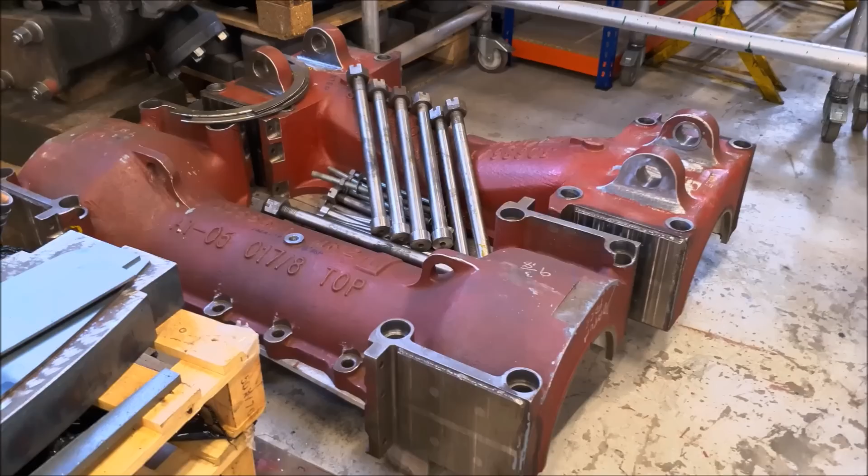These are the top and bottom halves of a cannon box for the intermediate and trailing axles. Unfortunately, when these were delivered by the machinist, we discovered that this area around here, where you see bare metal, the casting was actually over thick, and when we tried to fit the spring links which go into this gap here, they wouldn't go in properly.

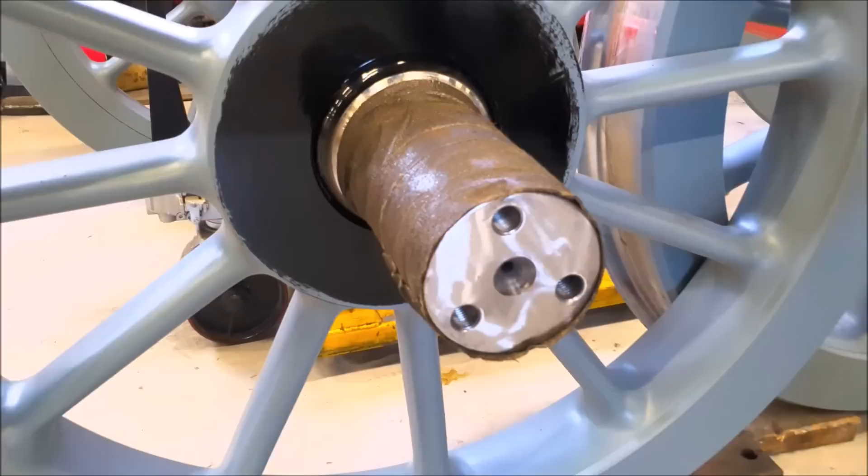So we called the company back to fix this, and this indeed only happened yesterday. They have ground off the old markings and applied the markings correctly using a low stress dot matrix stamping machine, which overcomes the problems of using ordinary metal stamps which have sharp corners on them, that might ultimately cause a crack.

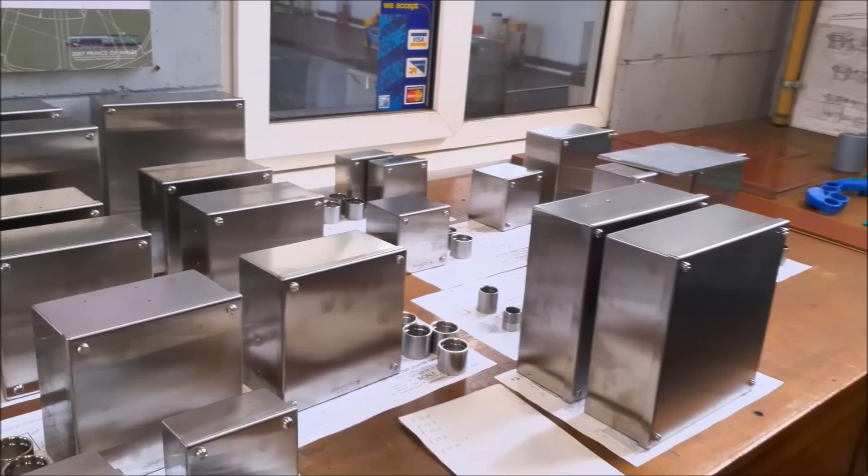This job will consist of drilling these boxes, which are part of a structured trunking, and then welding in these couplers. As you can see from the color of the material, everything is stainless steel, but now we are well equipped even to weld this material.

One of the less fortunate consequences of having taken the decision to put all the electrics into stainless steel is that stainless steel, when in contact with mild steel, has a habit of electrically corroding the mild steel it's attached to. To prevent this, all the boxes you see here will be mounted on insulating panels, in this instance made of Paxolin. Then when the whole thing is put together, we will earth the entire electrical system in one place only via a copper braid to the frame, and this should avoid the electrolytic corrosion which would otherwise take place if these boxes were mounted straight on the frame.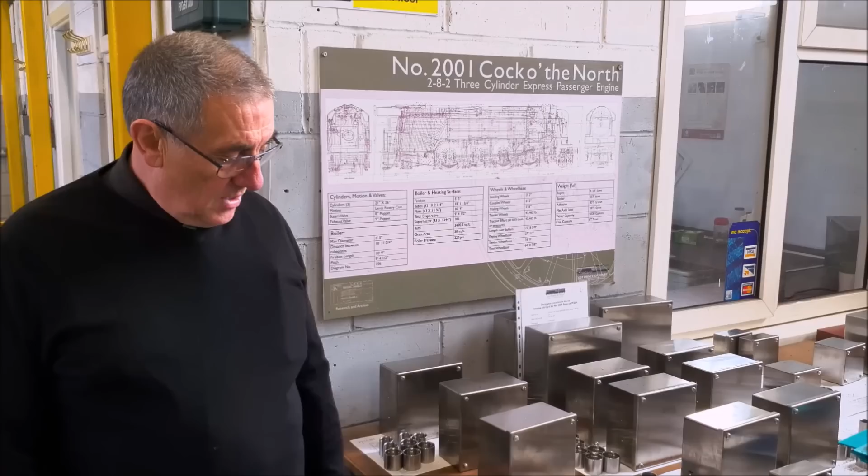Apart from the issue of corrosion, rusting and degeneration due to chemical action of the steel conduit on Tornado, another problem that has occurred from time to time is the fracturing of screwed joints in the conduit work. To overcome this, we have largely eliminated them. Instead of having a screwed joint, we have a joint ring like this with a small groove containing a rubber O-ring, and then a piece of pipe. The next piece of pipe is just slid into there and the O-ring keeps the moisture out. The benefit is that as the locomotive frame flexes, this can move in and out very slightly without incurring excessive stresses.

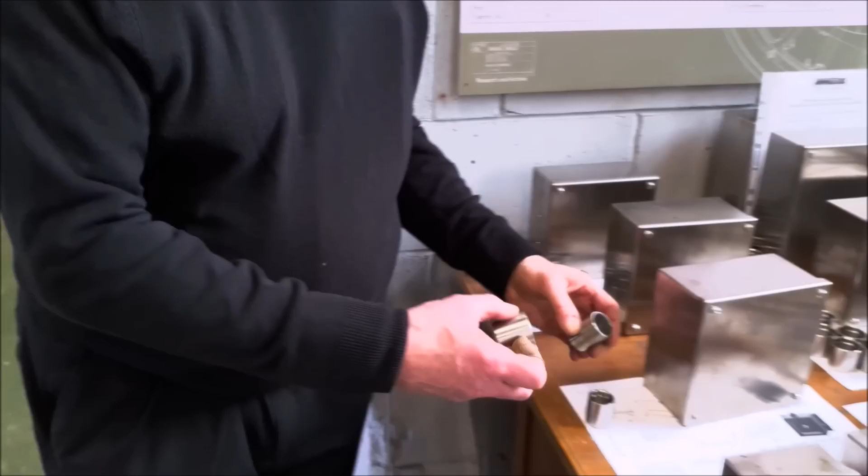As we can see here, Ian is in the process of manufacturing the many components for the structured trunking system which will carry the electrical wiring throughout the locomotive. This is a significant advance on what we did with Tornado, in as much as following experience with corrosion and one or two fractures of joints, the whole electrical system is being placed in stainless steel pipework and boxes this time around. The pipework has all been drawn from scratch. On Tornado, we worked off schematic diagrams and essentially laid the pipework out by me waving my arms about and asking the electricians to put the pipework in specific places. Unfortunately, this led on a number of occasions to having to do the job two or three times before we got it right. So this time we decided the entire pipework, for electricity, air, water and steam, was going to be fully drawn, to avoid the risk of clashes between various systems. And so far this looks to be working quite well.

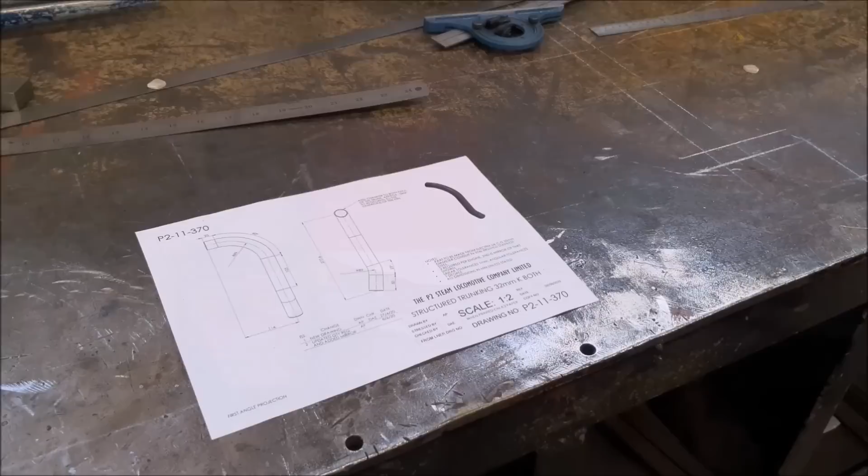Our electrical designer Alan has produced most of the drawings for the pipework and conduit system, and you see Ian is currently manufacturing one particular pipe from the drawing that Alan has provided. Alan has produced several dozen individual drawings of pieces of conduit work, and Ian is transcribing these into full-sized layouts in chalk on the bench here, which he will use to create the correct form for the pipe. The pipes are being largely hand-bent with heat, and then, where necessary, dressed to get the appearance correct. We are very hopeful that when this lot is placed on the locomotive, it will all fit.

Here on this piece of scaffolding, we have a selection of the pipework which Ian has already made up to form the conduits for the electrical system. Later this year, we expect to be doing much the same thing for the copper pipework for the steam, water and air systems.

Monday the 21st of September was a milestone for us, as the first of our coupling rods arrived from Arthur Stevenson's engineers at Atherton near Manchester. These go between the second and third coupled wheels, and the large hole you see at this end goes round the driving crank pin, which also carries the outside connecting rod. The opposite end goes on the third axle, and extending from either end of the coupling rods are what are known as the knuckle or gudgeon pin joints, which allow the coupling rod assemblies to move vertically as the locomotive moves over uneven track.

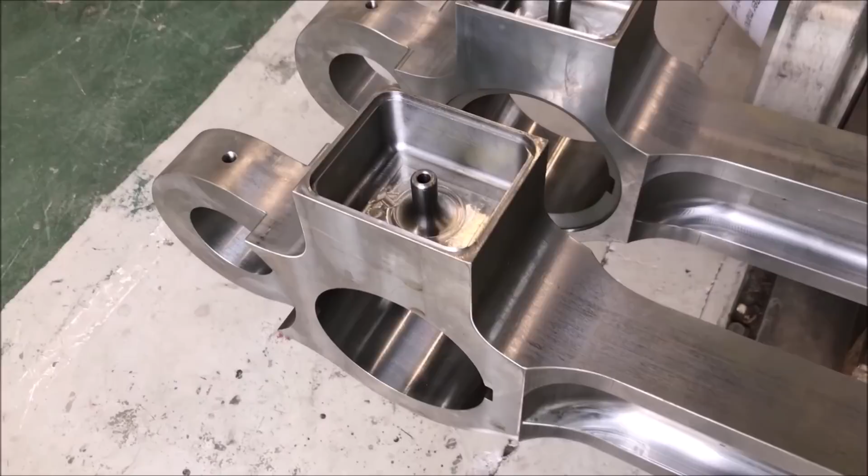We're now looking into the oil box, which will ultimately have a cover on it with a cork which enables you to fill the box up, and the tube in the middle is known as the siphon tube, which carries the oil down through a felt pad into the bearing, which we still have to manufacture. There is still quite a lot of work to do in fettling these rods to remove the machining marks.

Last week I received an email from a long-standing volunteer here at Darlington Locomotive Works, Gordon Wells, who also does a lot of work with the North Eastern Locomotive Preservation Group and the North York Moors Railway. The nub of the email was that they had found a continental type turbo generator in their stores, which they estimate had been there for about 20 years, and would we be interested in it? I replied immediately, yes please, and I'm pleased to say that today we were able to go over to Grosmont and pick up this turbo generator.

Having got it back to Darlington, I took one or two of the covers off and had a look at it, and was astonished to find the condition it was in. The rotor and the dynamo rotated freely, the steam control valve looked like new, and so I thought we might try and see if it would work on compressed air.

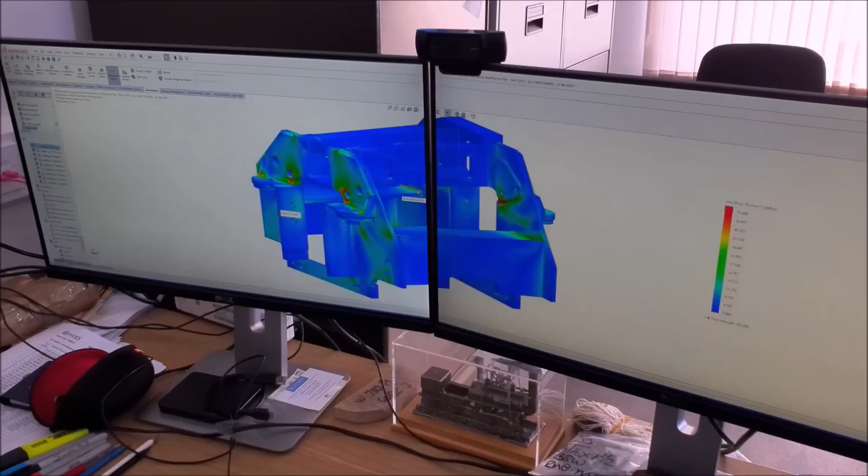Although the improved pony truck design that we are fitting to 2007 is very closely based on that which was fitted to the V2 class post-war, it is sufficiently different, and because it's basically a safety critical item, it is necessary that we do some analysis on this to ensure that it's going to be strong enough to do the job. There's also the point that because of the criticality of it, we have appointed one of the Derby railway consultancies to...

independently review the strength and behaviour of the pony truck to make sure that we haven't missed anything. This is a finite element analysis stress view of the pony truck frame, where the colours represent stresses in the metal with the maximum likely load applied to the pony truck. The nearer to red it is, the higher the stress. This has shown up certain areas where we have had to take great care in the design of the welds, and have slightly altered the profiles of the welds to minimise the maximum stresses being experienced.

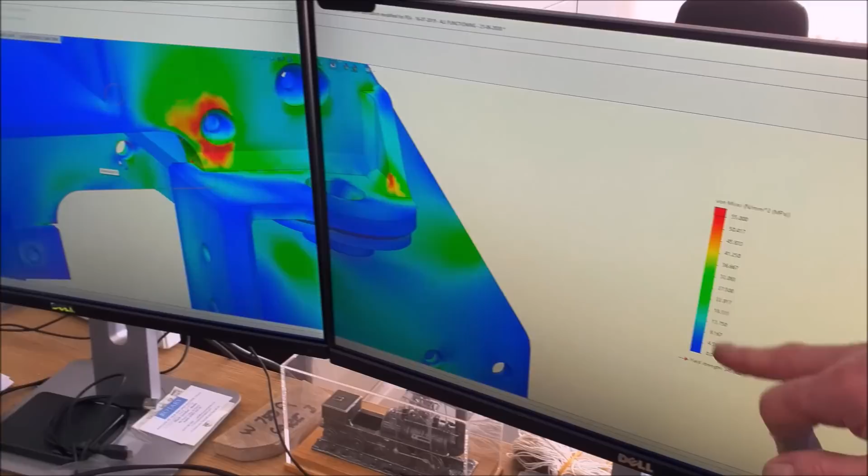If you swing slightly to the right and look at the screen here, you will see there is a scale of what this all means. In practice, the good thing about this is that the highest stress looked at there is actually the yield stress of the material, and we've now got the design such that we're nowhere near the maximum yield stress in any part of the structure. Most of it, as you will see where it's green and blue, the stresses are very low indeed. As is to be expected, the high stresses are occurring in the corners of welds and around holes where we've got bolts put through.

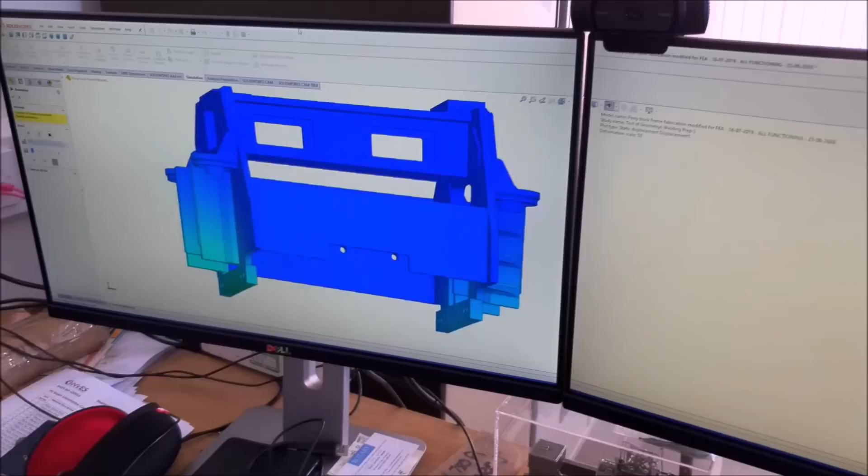This is another simulation we can do with the finite element analysis system, where we can show the displacement of various parts of the pony truck frame when the load is gradually applied and then released. The actual movement you see is very highly exaggerated. In practice, it's small fractions of a millimetre on the real thing.

This concludes our virtual tour of Darlington Locomotive Works. I hope you've enjoyed this presentation, and we very much hope that next year you can come here in person.

Ladies and gentlemen, at this point, what I'd like to do is to expand on some of what I call the major policy issues that we have defined, I think through a natural process, but have formally been announced during my time in office. Now, the first one, for absolute clarity, so you understand what's going through our minds, is the issue of 90 miles an hour.

Now, we're all well aware of what happened to Tornado. That was an unfortunate incident, and the engine is more than capable of 90 miles per hour. But the cost of preparing the engine to do a 90 miles an hour run becomes almost exponential above 75 miles per hour. In addition, there is undoubtedly in some quarters of the modern railway a degree of concern about 90 miles per hour, and we need to recognise that we need to keep people on board, and friends and train operators who are going to be managing our machines are not as keen on 90 as perhaps we were. So as a consequence, we will not be routinely travelling at 90 miles per hour on advertised trains.

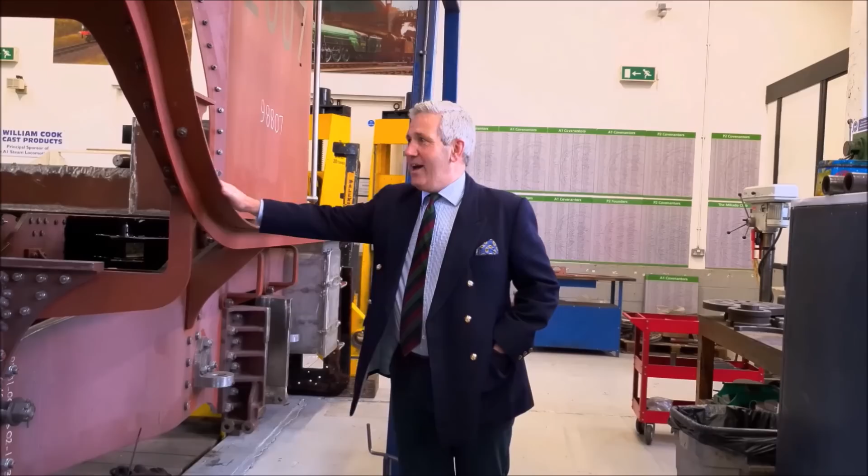Now, if like me you are proud to be British, I think you'll feel that what we're doing here at Darlington and elsewhere is something quite quintessentially British. We're a crazy nation, we never know when we're beaten. We certainly enjoy taking on Mission Impossible, and for those of you who remember the A1 coming together, everyone thought that was Mission Impossible. But it's not - it's here, I'm touching it, it's real, it's live, it's metal, and in a couple of short years this thing will be utterly wowing the crowds.

Now, at the expense of being accused of being a stuck record - and you'll get bored with this theme - but if every one of us, and more, and your friends, contributed just a little bit more into this project, we will be well set to deliver it in time for the end of 2022, early 2023. So many of us want to see this machine come together.

We want to see it in all of its magnificence. We want to see it in a form which is far more efficient than it was when Gresley built it. David Elliott and our engineering staff are working really hard to ensure that those faults and weaknesses with the original engine, such as the valve gear and the pony truck, are engineered out. It's an extraordinary project, and I really do hope you feel excited about being part of it, but most importantly, you want to see it happen, and soon.